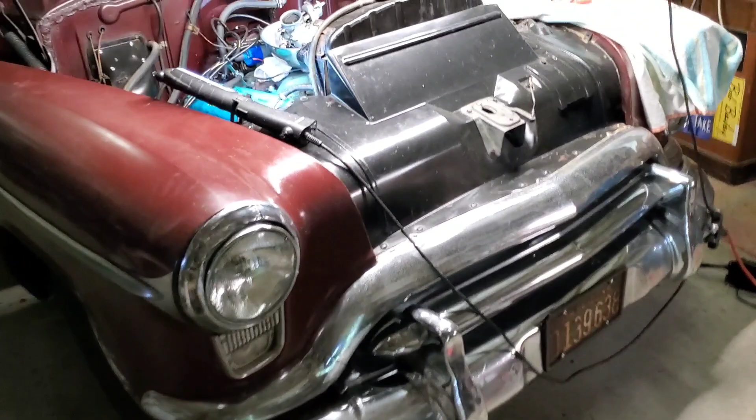Hey Jim, I really want to do more to my beautiful $500 four-wheel drive Ford truck, who has been lovingly nicknamed Pluto.

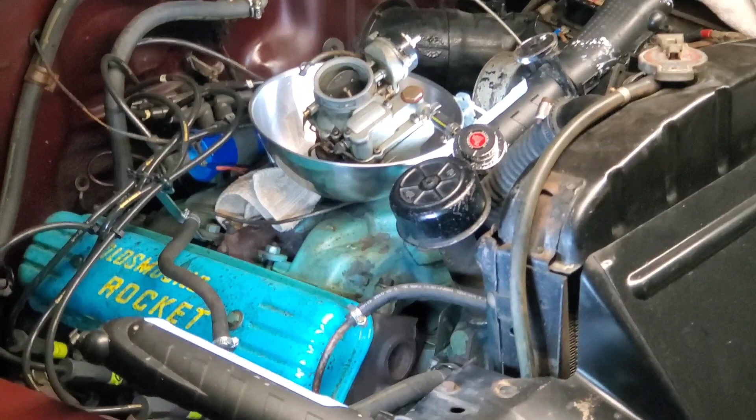Well, I got some plans for that old truck. But today I'm going to get down to this carburetor issue here. I rebuilt this carburetor a while ago, and it's been giving me some crazy sort of behavior.

I first put it back on the car after the overhaul and went to start it up, and the car ran absolutely beautiful, better than it's ever run. So I let it idle for a couple seconds, maybe 30 seconds, revved a little bit, not a lot, and it was just running beautifully.

Shut her off, came back out probably 2 or 3 days later, started her up, she's running great. I drive out to the road, going about 1.5 miles to a little gas station. As I'm getting closer, it starts running a little weird. Pull in, shut it off, filled up with gas, tried to start it, it won't start.

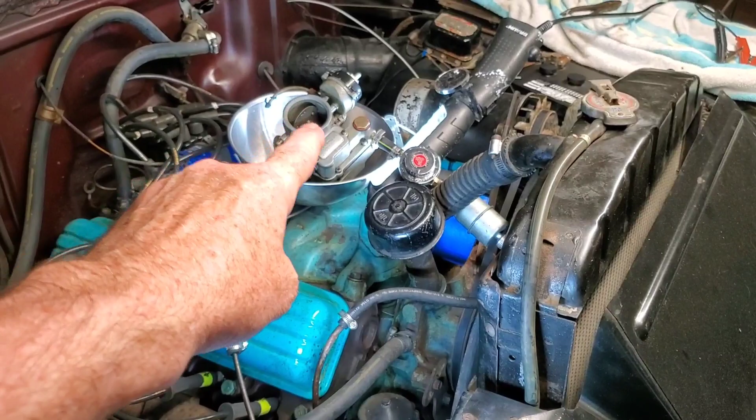I smell tons of gasoline coming out. I look underneath the air filter, and there's gasoline overflowing out of the carburetor. Luckily, I was able to get it home that day.

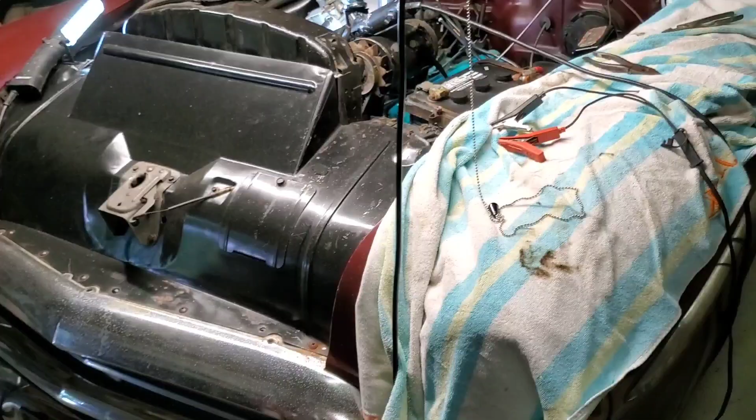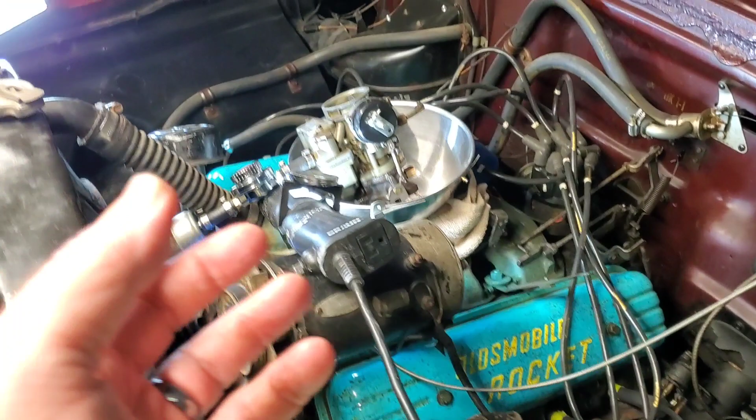So I've been kind of struggling. I thought at first I had messed up my float level, and it turns out I did. I took it all back apart and reset the float level, made sure the metering rods and the pump and everything were all adjusted correctly, and it's all good.

Put it on the car, start her up - I didn't even start it up actually, I just turned on the fuel pump, and great, it's working great. So I shut the car off, turned it on again, and it starts leaking like crazy the second time around, after it had sat there with gas in the float. So I'm really starting to think there has to be something wrong with that float.

So I'm going to bust open this carburetor again. You can see I've got it sitting in a bowl because I got a pressure regulator to turn it all the way down to just 1 pound of fuel pressure, to see if maybe my pump was putting out too much pressure, since this car has an electric fuel pump. It did the exact same thing with only 1 pound of pressure.

First time on, when it's a dry bowl, everything's good. About a minute or a minute and a half in, it starts leaking like crazy. So I'm going to open it up and inspect the float. It's got to be the float somehow.

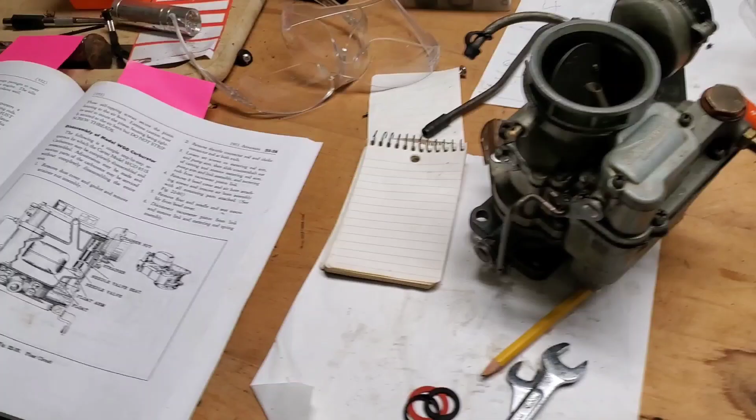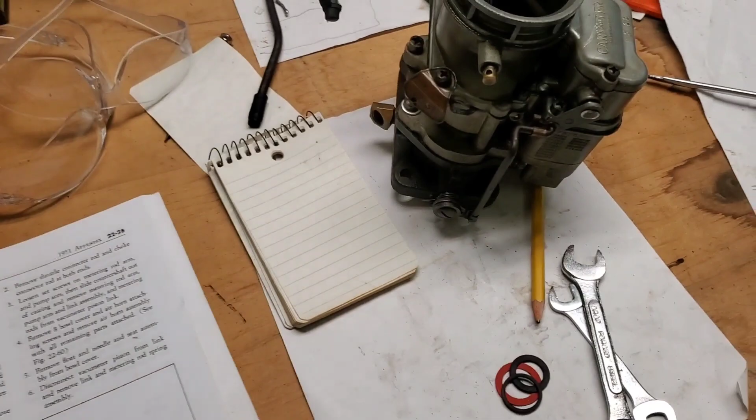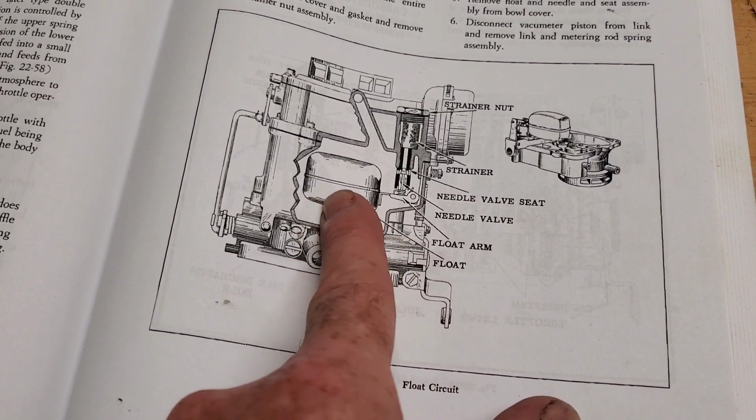Let me say once again, I do not know what I'm doing. I rebuilt a carburetor when I was 17, and this one. Anyway, at least I have this manual, and I suspect my problem is somehow it's got to be either this float is leaky or there's some problem with the vent maybe. Why can it shut off the flow no problem until the second try, and then floods like crazy?

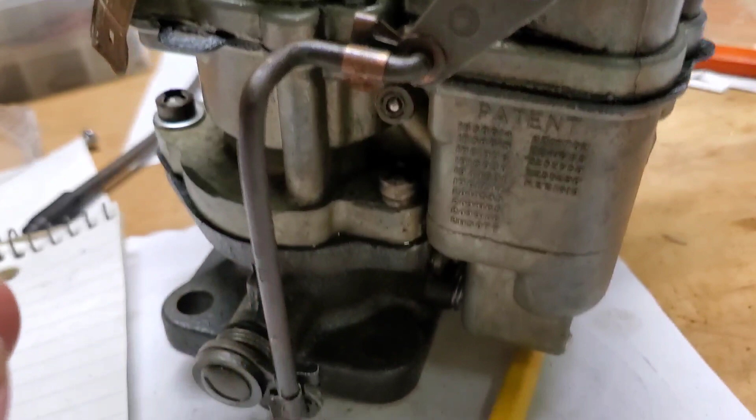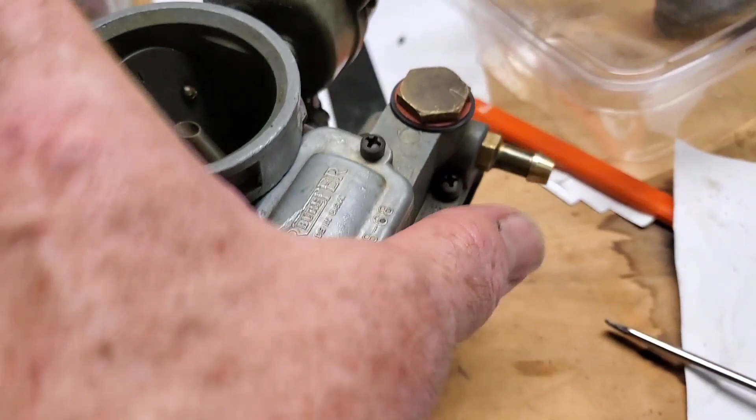So what I'll do is take off this dust cover, these 2 screws. That will expose the top of the metering rods and a piston, and then I'm going to disconnect at least the top of this - I don't know if I'll do the bottom or not. What I'm ultimately trying to do is disconnect all of these screws and take the top part off. I've got to open that up and take out, there's like 8 or 9 screws all the way around it. But I have to at least disconnect the top of that linkage, and the top of this linkage, I believe.

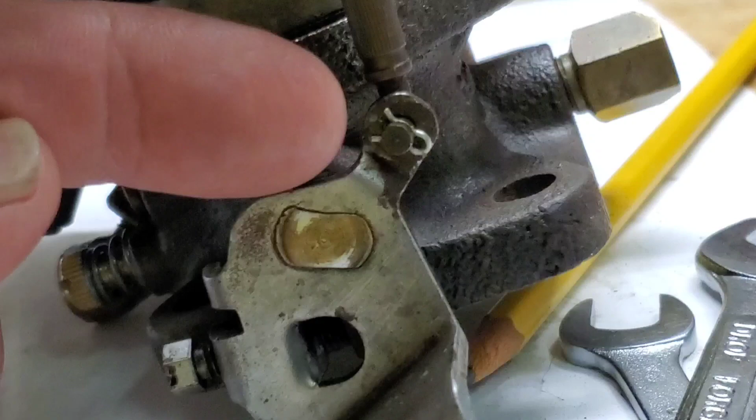Oh no, not the top - the bottom, that little bugger right there. It's got a little tiny clip on it that you have to pull off, and it's got a lot of spring pressure. Boy, if you let it slip away and it pops, you'll never see it again. So, all right, try to be careful.

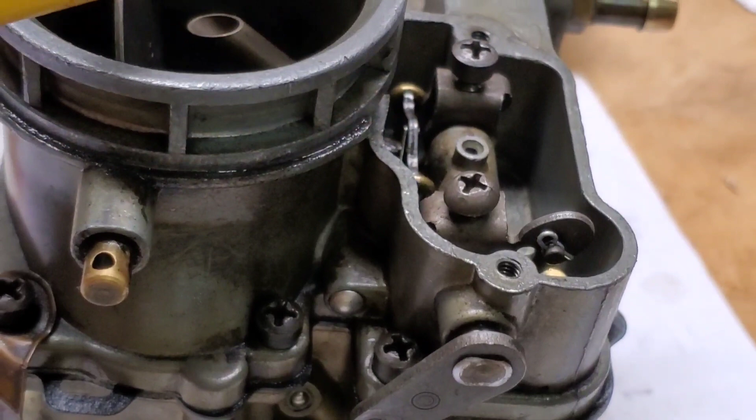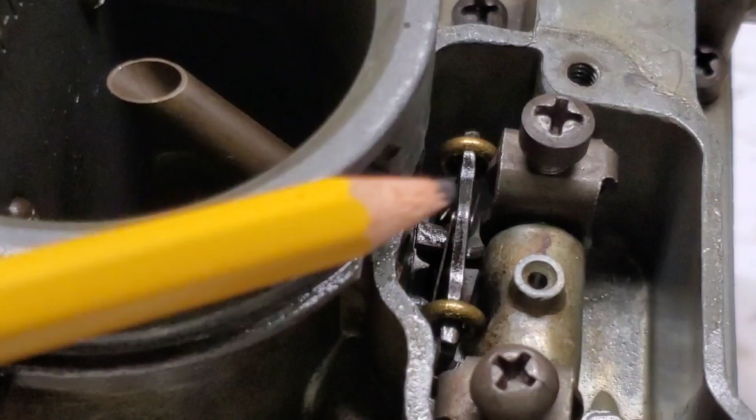Next, I have loosened these set screws right there and right there - that one's for the metering rods, this one's for the accelerator pump. Now that they're loosened, I am going to withdraw this rod here that will release all of this stuff. Then I'm going to pull out this little assembly here that has - where's my pencil - there we go, this one right here. That one has the ends right there, and right there are the metering rods. So we're going to be able to pull all that stuff out by pulling out this shaft right here.

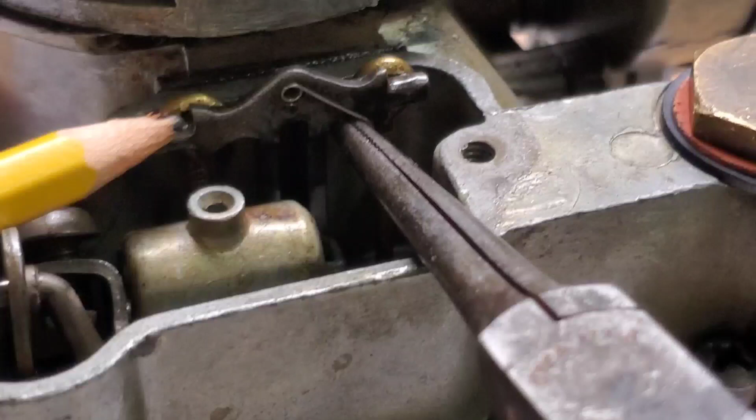Now pop them off the end there. I slid it to the very top of its travel, and that allowed enough flex in the metering rods to be able to pop them off where they ride on right here. So they're now both behind, so I'll be able to let this assembly go back down, and then I should be able to pull out the metering rods.

All right, there's one. And let's get that second one. There we go. All right.

Now all these perimeter screws have to come out. They're all over the place. There and there. That one has a tag under it.

Couldn't find anything wrong. The float does not leak. It had nothing inside of it. Everything looked good on the needle and the needle seat.

It's all refreshed. So now, without putting everything back together, I put the top back on. I'm going to hook it back up to my fuel supply, and see if I can make it start leaking again.

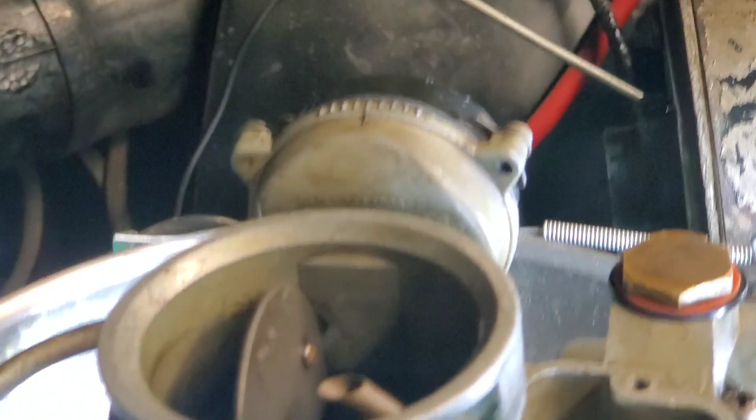Okay, fuel pump is running, and I don't see any leakage. Nothing leaking. It's all good.

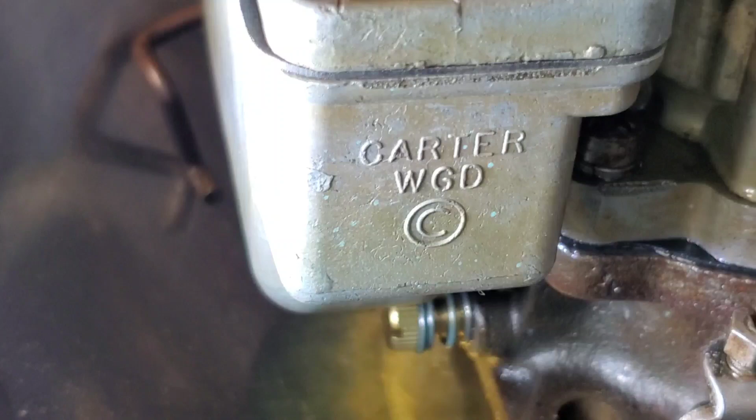Now let me shut it off. All right, I waited about a minute. Turn her back on. And... leaking. Drip, drip, drip.

I have to get a better look at where it looks like it's leaking in there. Okay, I've set the float level lower. Let's try it again.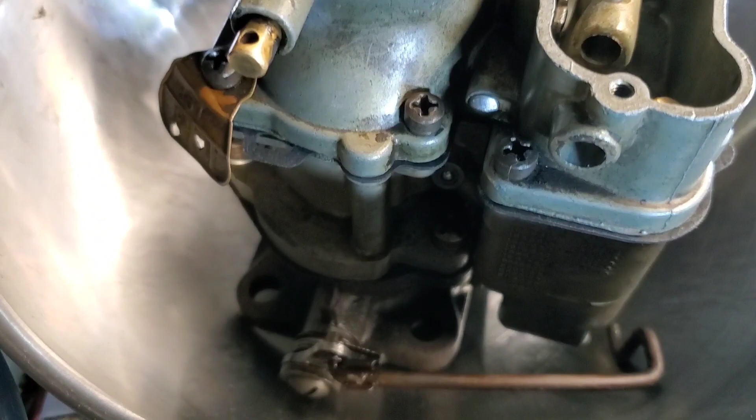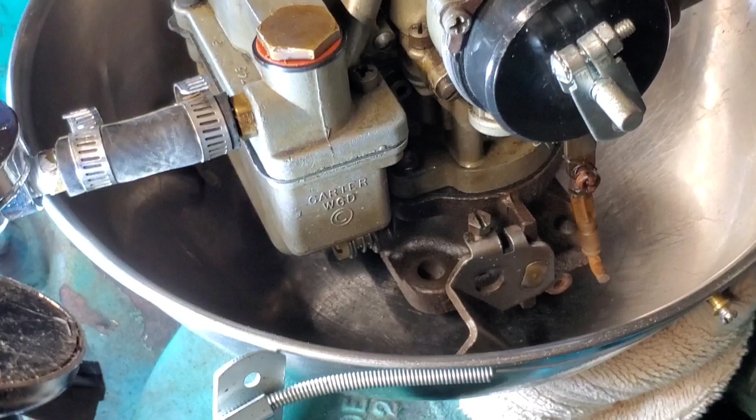Pump's running, I got no leaks. Pump's been running for 30 seconds, no leaks. All right, I'm a minute in, not a drop. Okay, I shut her off. I don't see anything leaking at this point.

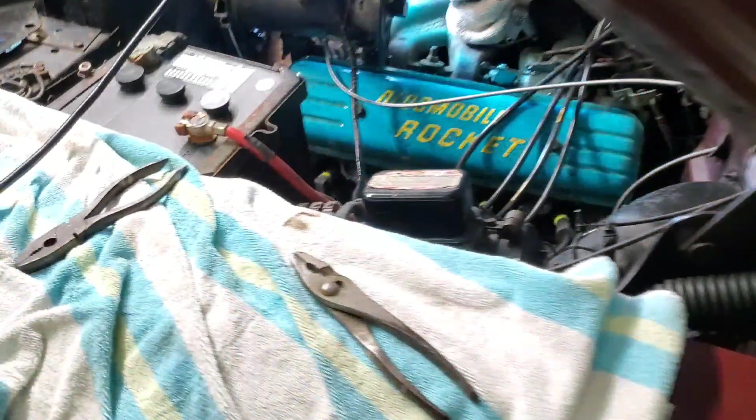I'm going to give it a minute or so. Okay, try it again. And, well, I think I'm seeing some slight dripping down there. Yep, definitely leaking. But it seems to be less.

Okay, so I'm going to make the float level lower. Maybe third time will be the charm. There we go. First pressurization, you can hear the pump running and no leakage. Let me shut her off, wait a minute, and turn it back on. Third time, all right.

I do not see any fuel leaking. I can smell a tiny bit. Okay. I do not see any leakage. Oh, man.

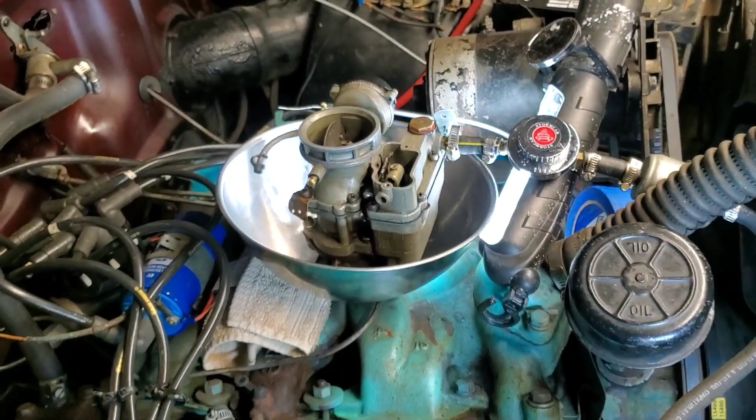Okay, I'll put it back together now, and the float level is way different than what the manual says, but if that's what works, as much as I don't like to say it, I guess I'll go with it. So I'm going to put it back together now, and I'll show you how to adjust some of the stuff.

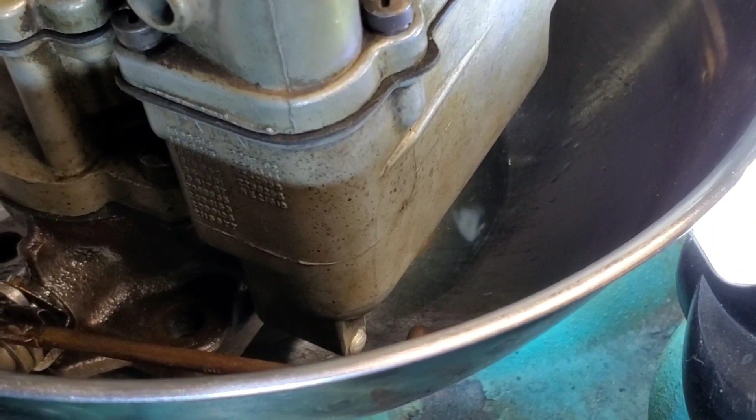Oh, wait, I see a leak. Oh yeah, it's leaking right there, right now. Stupid Flanders.

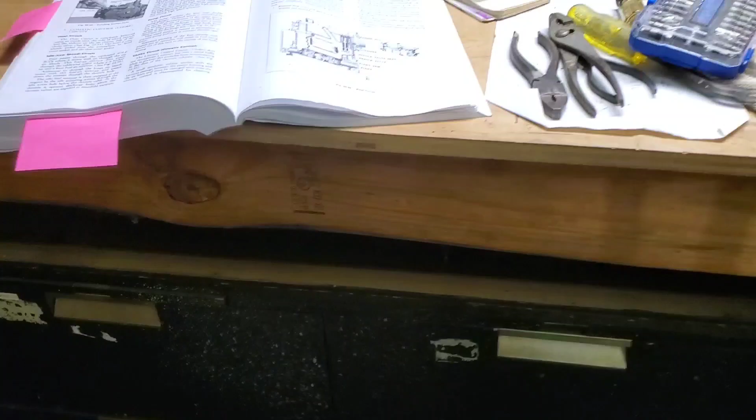Well, that all happened a couple of weeks ago. So I kept thinking about it and thinking about it. And it has to be the float circuit, it just has to be. So I went back to my book, and I'm looking at this picture here, and I took my carburetor apart again.

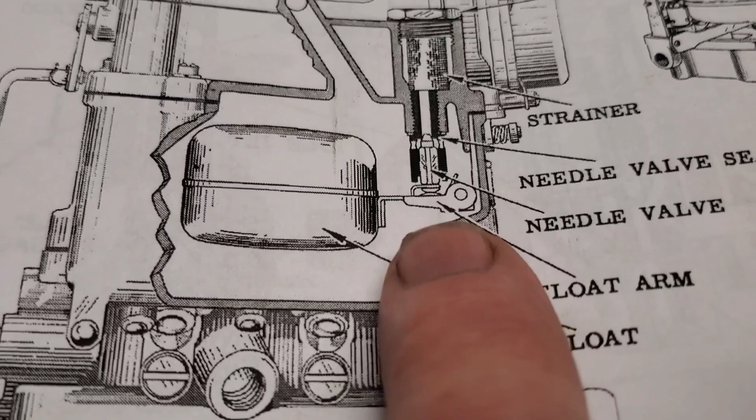Started comparing everything, and then I realized I had been very careful to bend just this little tab here as I was adjusting the level of my float. Then I was looking at it, and on my float it wasn't straight here, it was bent.

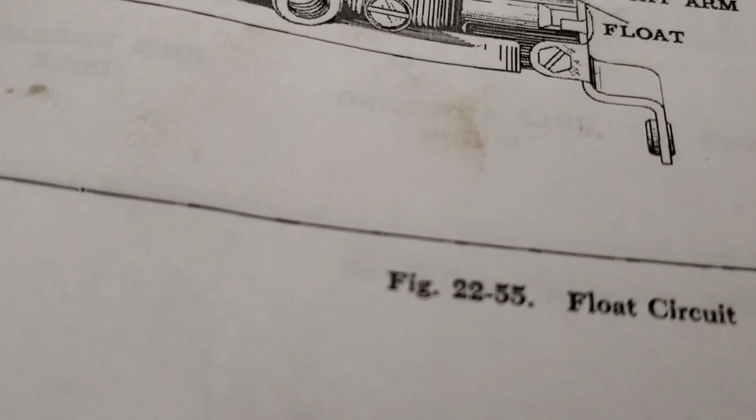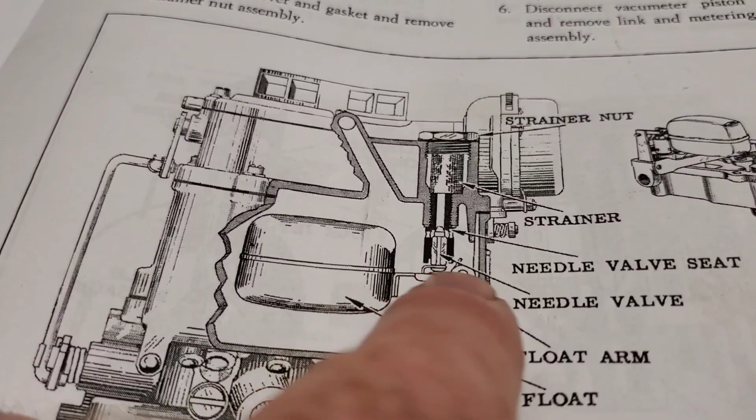So instead of being flat, it was like this. So I made it flat, straightened it out, redid the float level adjustment correctly according to the specs given in the book here, and it worked fine. It stopped leaking. So it was this piece right here not being true. That's what caused all the trouble.

So as far as adjusting stuff goes, the final adjustments when we put it all back together are really all you're going to adjust is the metering rods. And let's see if I can find it here. The metering rods, yeah, here we go. And the...

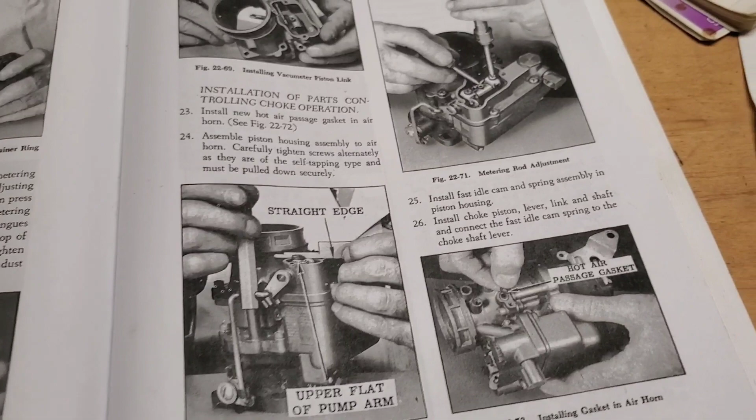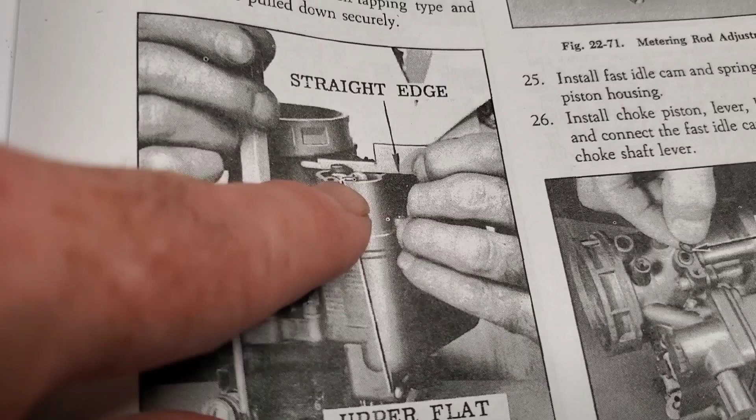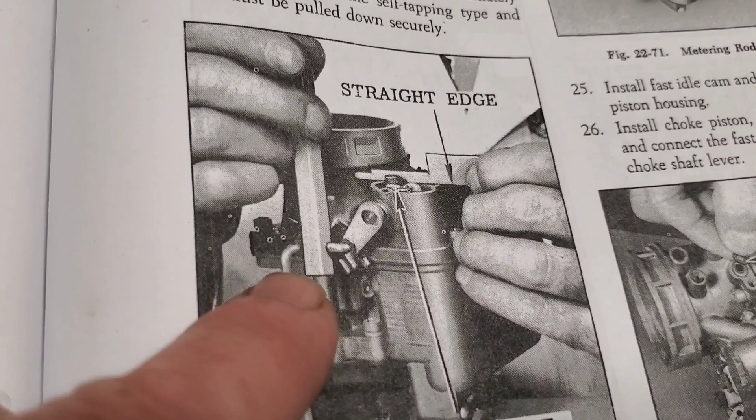Pump adjustment. So if you're going to need to adjust your pump, you want the upper flat of the pump arm to be perfectly even with the top of the housing here. And the only way to adjust it is to actually bend this rod. That shows him with a little device on there to actually bend the rod to make the adjustment.

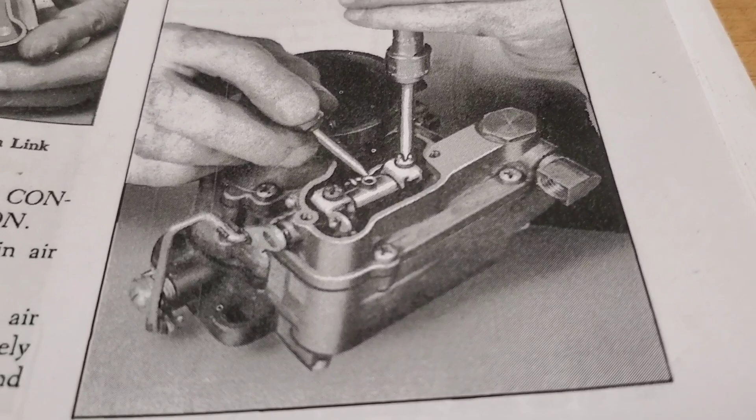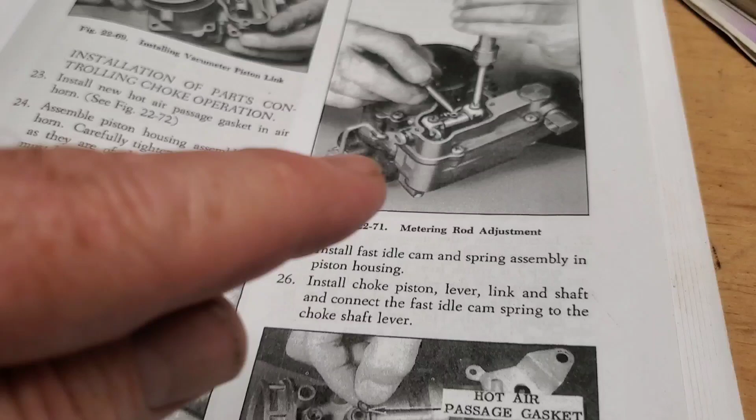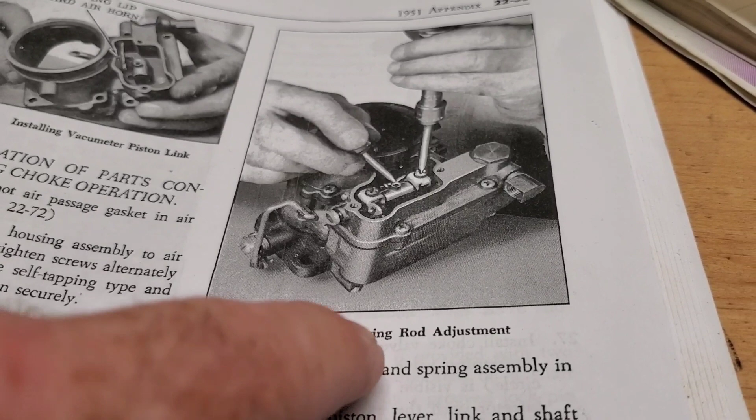And for the metering rod adjustment, you'll have everything all back together, and then you need to turn your idle screw that is on the bottom of the carburetor. You want to turn the idle screw all the way out so the flap on the bottom of the carburetor is completely closed. Once that's completely closed, you reach in and the little slide that the metering rods ride up and down on, that's like the vacumeter piston.

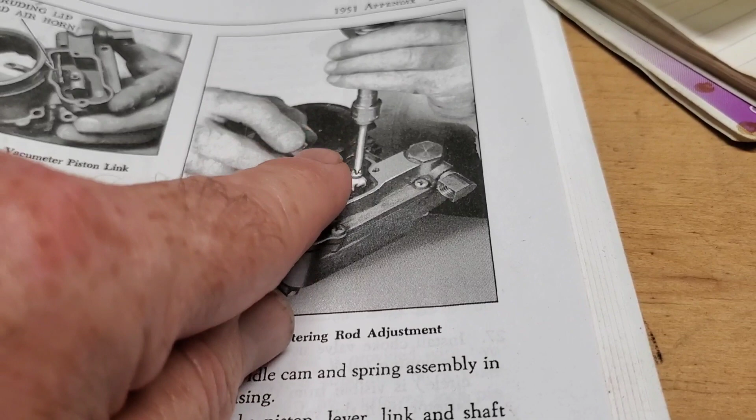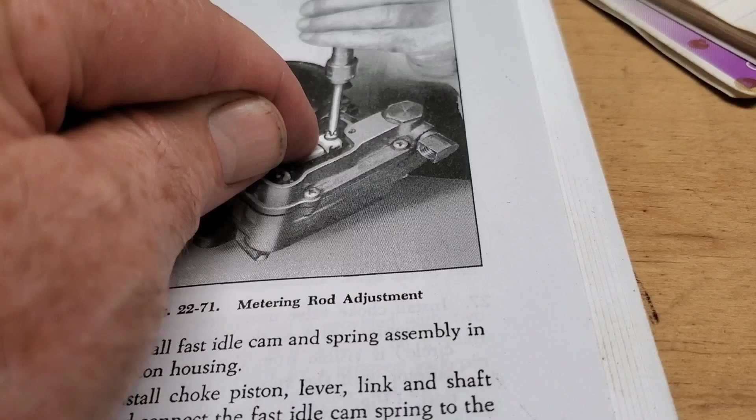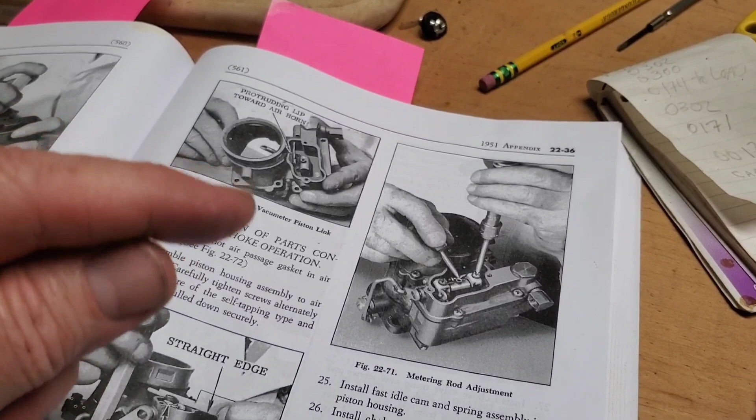You have to push that down with your finger to make sure that the bottom of those metering rods are touching inside. They go all the way down and they're touching, and then you tighten the set screw here. Then you've adjusted it properly. Then when you put your carburetor back on the car, you'll have to adjust your idle speed back up, and that's how you do the final couple of adjustments.

Oh boy, this thing got to me. I just never gave up, but it sure took a while. Took it for a drive, we drove it all the way up to North Carolina. We went to Tryon, North Carolina the other day. It still needs a little bit more tweaking, it's not quite perfect, but it's running good enough to drive. So, thanks for watching.